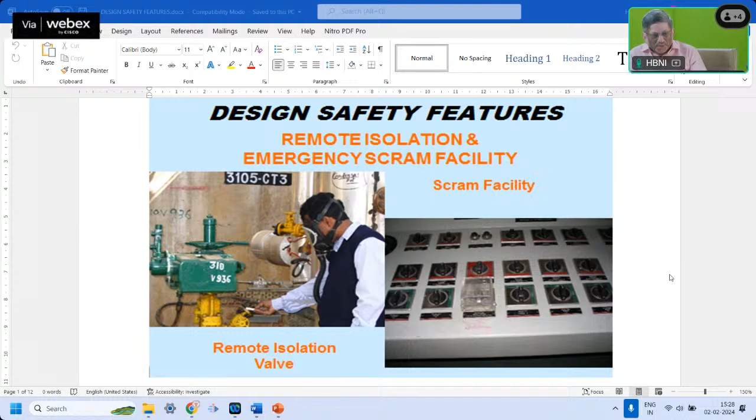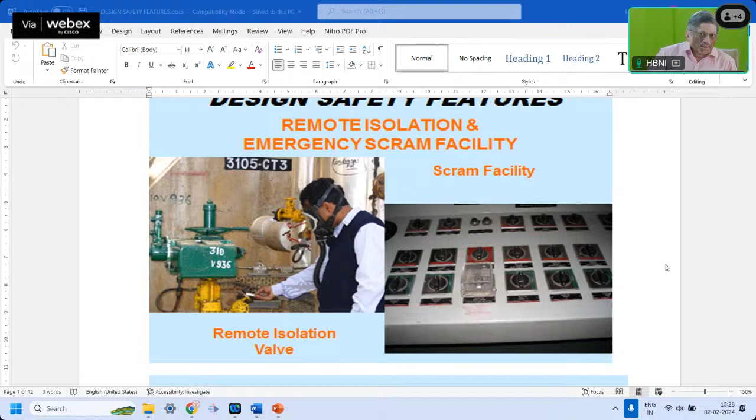So friends, I will just share some design safety features with the photos. Yes, design safety features, the earlier one. Just an introduction: these plants are outdoor installations. They are remotely operated, away from populated areas, and the plant has remote isolation, meaning any part of the plant equipment which is leaking or to be maintained, we can isolate immediately. If it is an emergency, we can isolate immediately. There are remote operated valves, air motor operated valves, which I have shown in the picture.

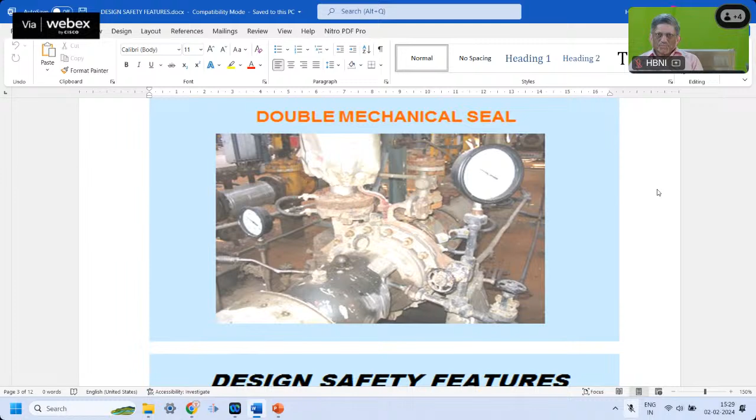Seal oil system. See, in our plant, for circulation of H2S gas, there are big centrifugal machines. For the shaft sealing, the compressed gas should not come out. So there is a seal and seal oil is injected in the seal. Therefore, H2S will not come out.

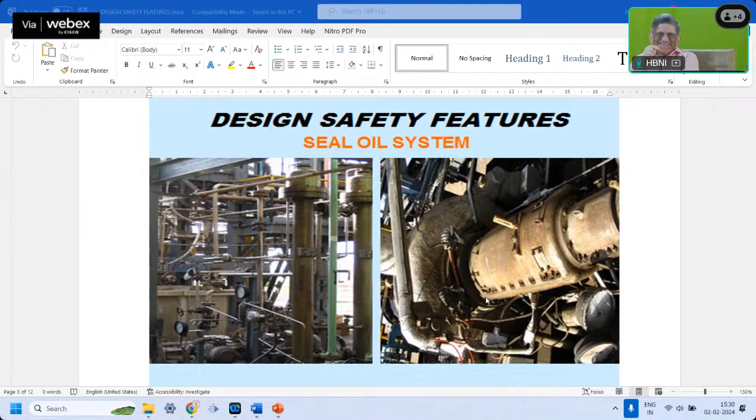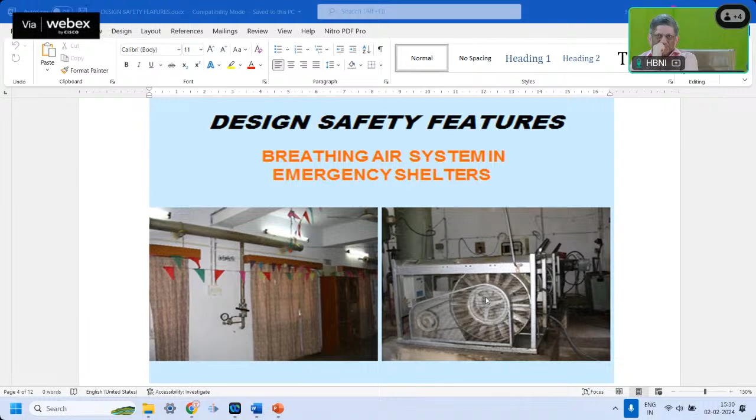Next, there is a breathing air system. Number one, in the control room, breathing air supply is there. It is leak-tight, so that if H2S is released, it should not come inside the control room. Similarly, there are emergency shelters. If there is a release of H2S gas, people are supposed to assemble in the shelters where breathing air is provided. These are the shelters with breathing air stored in the cylinders.

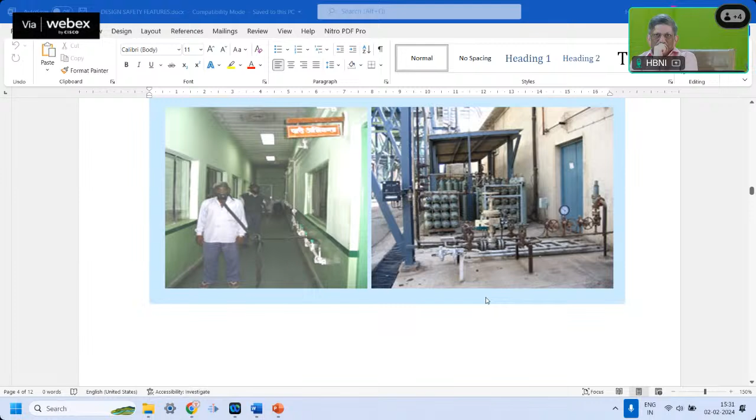Emergency power supply. If the normal power supply fails, then there is a backup of class 3 supply, that is a DG set supply. Also, there is a battery backup supply; there are class 1, class 2 supplies for emergency operations of the instruments and indications. Next.

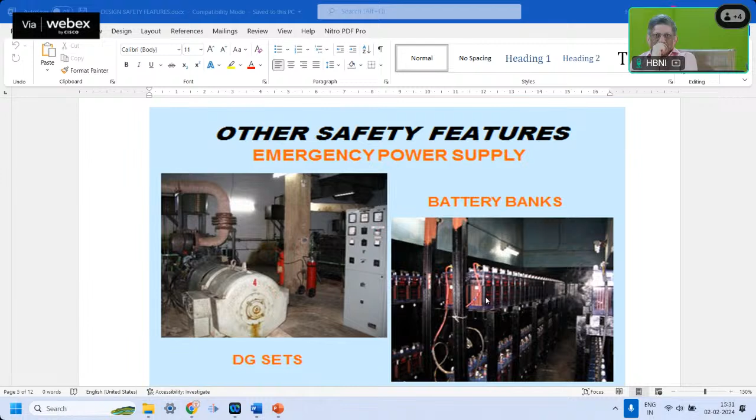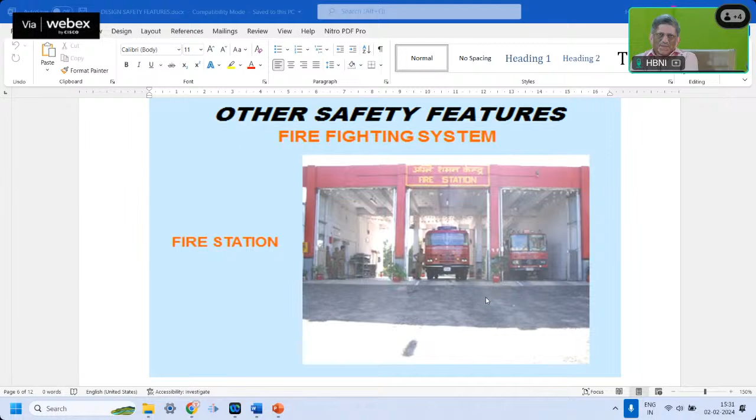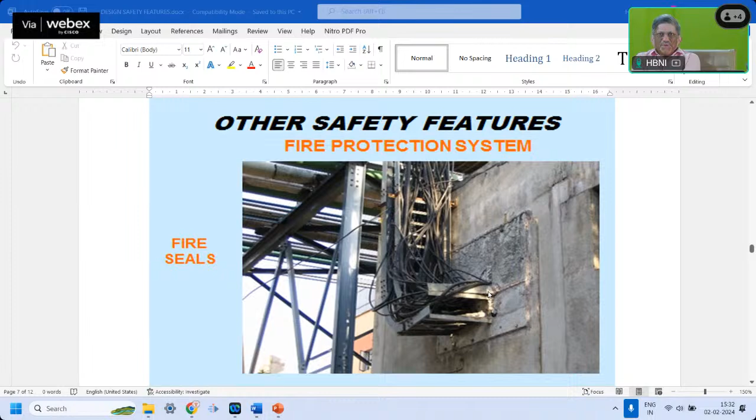Next. Fire protection system: there are H2S storage tanks. This H2S is soluble in water, so there is a fire water spray system that is called deluge system. In case of leakage, the fire water is sprayed to minimize the release of H2S gas from the leaking tanks. Not only that, the content of the tank can be transferred by gravity to the other tank, because it is stored in liquid form.

That is one feature. Secondly, the gas from the tank can be burned through the 120-meter tall stack and released. If there is a leakage from any tower, this tower can be emptied out and the gas can be safely burned at 120-meter height, and it will be released safely. Next.

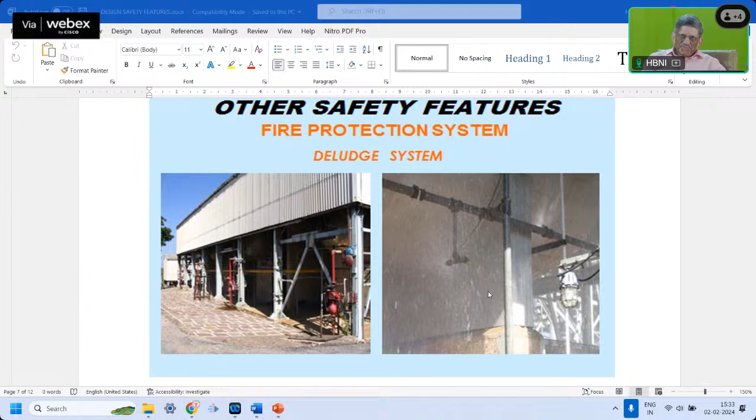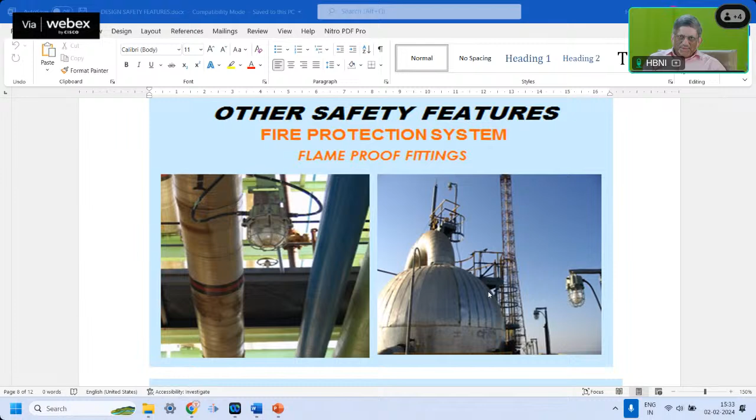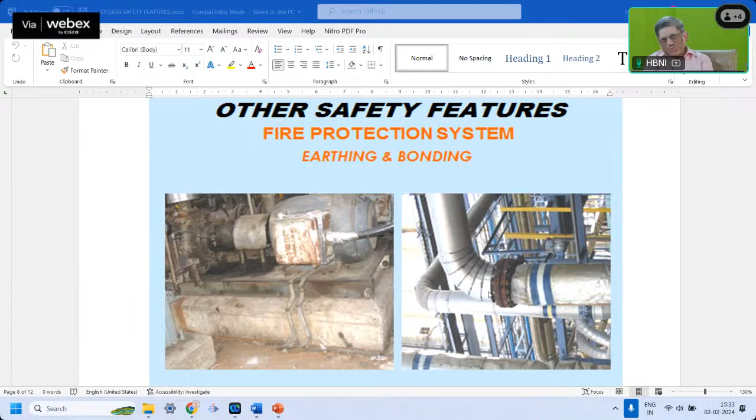There are flame-proof fittings, etc., so there is no spark in the flammable area. Next. Fire protection system: earthing and bonding is provided where there is a chance of a source of ignition, and also to take care of static electricity. Next. Fire alarm system. Next.

And as I told, there is a flare system, which is very important. If there is any leakage from any pressure vessel or tower, the tower containing about 50 tons of gas can be released through the stack within half an hour. It can be burned. Next.

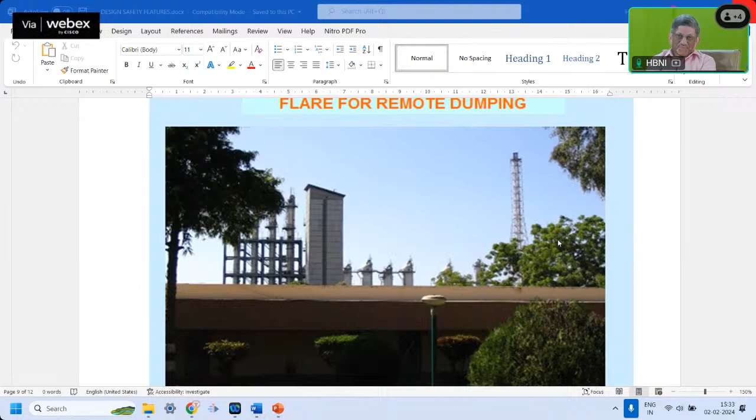So the design safety features are the backbone for safe operation of a chemical plant, and these design safety features should be monitored and kept in healthy condition. If you see Bhopal, design safety features were provided, but they were not in line. Now, to ensure that we have operational safety features, one is the technical specifications of the plant. The technical specification prescribes the monitoring and what is to be done if there is a failure or non-availability of the safety system. So that is a very important system in our plants.

Then training of the operational staff is very important. The requirement of the job and the capability of the operator should match, so we retrain the staff regularly. Authorization of the operational staff is another operational safety feature. Every 3 years, we check the manpower, whether they are upgraded. At that time, we check their capability with respect to attitude, skill, and knowledge.

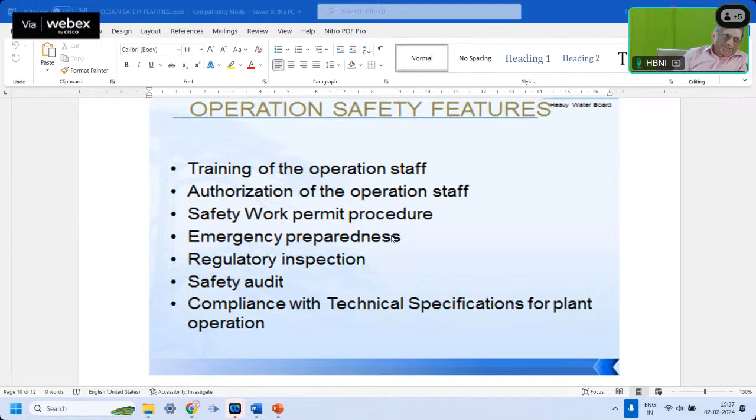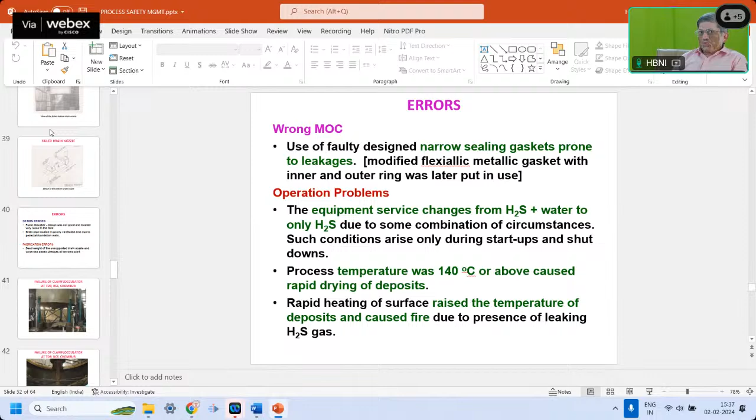So, because of these safety features and maintaining healthiness of the safety systems, there are no major accidents. However, I will discuss with you a few case studies. Friends, the accidents were mainly workplace type, mostly fall from height, then non-use of PPE, some flashovers, and these are the main ones. There were a few fatalities because of inhalation of H2S gas, but those were mainly due to non-use of PPE. So let me share with you some case studies.

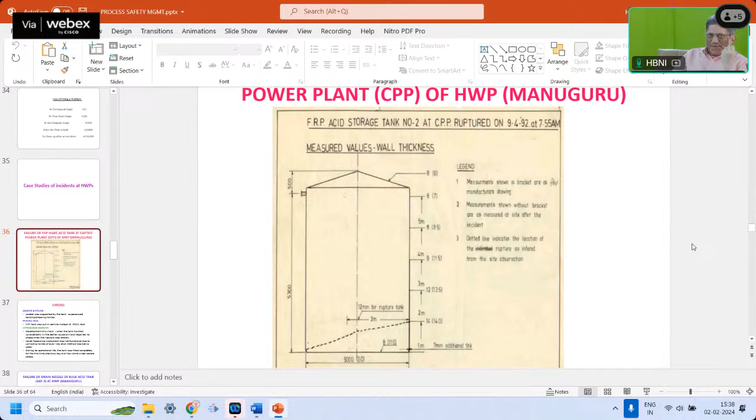So see, the design process, their ladder was supported by the tank, experienced bending breaking forces. FRP tank was put in service instead of MSRL tank. So the material of construction was not appropriate, and there were operational errors, development of cracks when the tank buckled during operation.

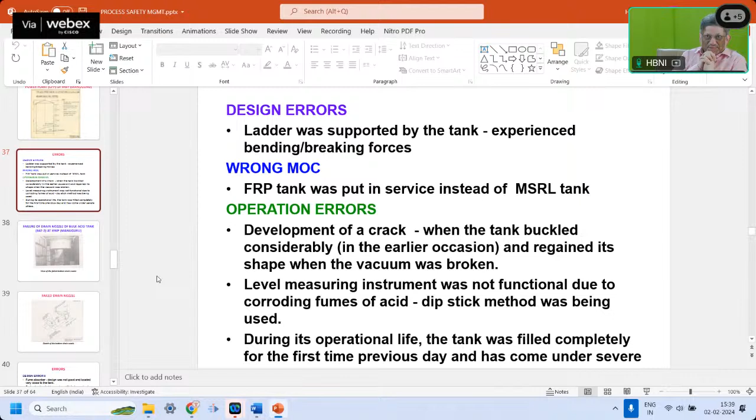See, in these storage tanks, if you drain the tank without opening the vent, then vacuum is generated, and the tank buckles and develops that defect. Level measuring instrument was not functional, so there were other errors. During the operational life, the tank was filled completely for the first time the previous day and came under severe stress.

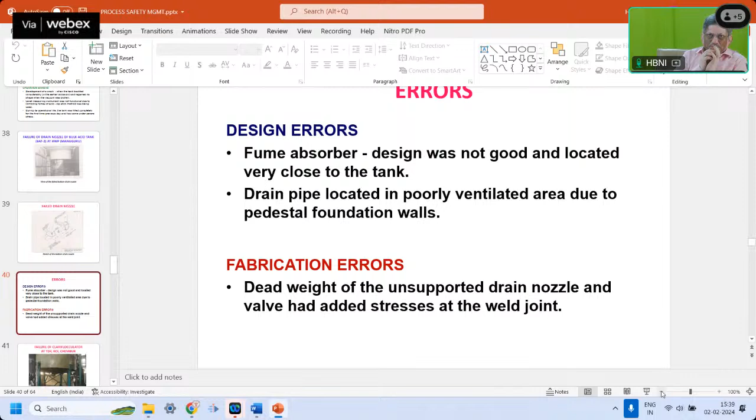This is another acid tank failure. You can show this photo, the upper photo. Okay, next. See, this is a bulk acid storage tank where the fume absorber is there because the acid releases fumes.

That fume absorber was located very close to the tank and it was not working. So it corroded the drain point and the drain pipeline itself collapsed, and all the acid in the tank, about 200 metric tons, got released, and it could be collected in a neutralization pit. The picture of the drain nozzle is shown here.

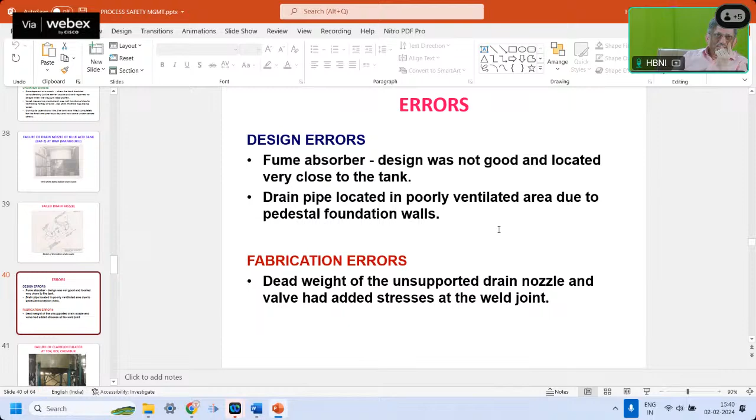So now we have made acid tanks as smaller tanks. They are rubber lined inside, outside is a bulk tank.

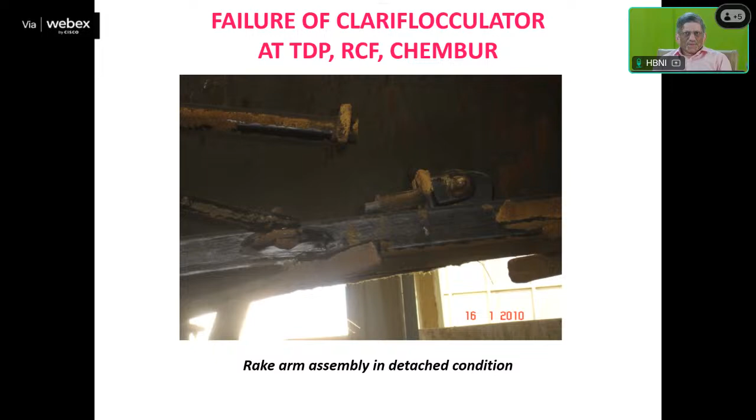So I will cover again - there was some acid tank failure because of the wrong material of construction.

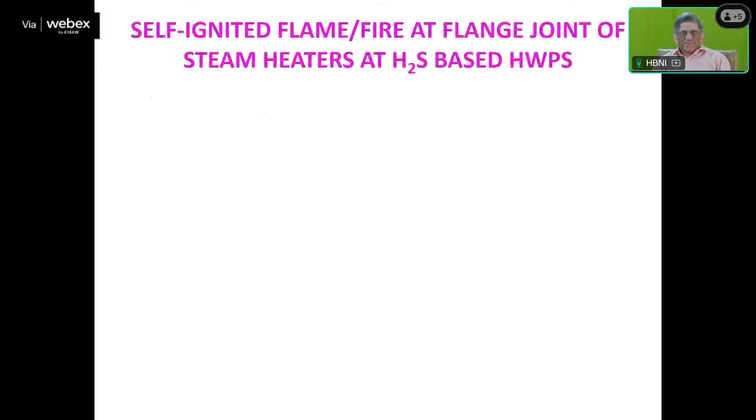There was a fire of H2S gas. The reason was defective gasket, improper flange joint, and hydrogen sulfide forms iron sulfide, and at high temperature the gas leaked and it got ignited.

Now, one lesson we learn is how to fight gas fire. Number one, we must stop the source of the gas, isolate the supply. If it is not possible to close the isolation valve, inject an inert material like water or nitrogen. So this is the lesson we learn on how to fight the H2S gas fire.

We cannot extinguish the jet fire because the gas is coming with pressure. If you put water, maybe the gas flame will be extinguished, but it can get reignited, or unburned gases will get released into the atmosphere and they explode and cause more harm.

So it is not possible to extinguish the gas fire. The solution is: stop the supply, inject some water, and cool the nearby pressure components. If the flame is touching a pressure component carrying hazardous, toxic or flammable material, then that will melt and the fire will increase again. So cool the nearby structure till we isolate it. This is a very important thing we must know while fighting gas fire.

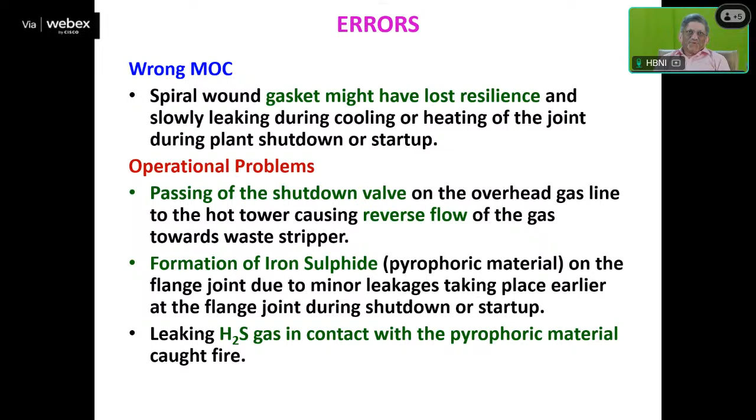Another thing, electrical fires.

Electrical fires are caused mainly by temporary connections - that's number one - and then maintenance. If the maintenance of the breakers is not done, then it causes fire. Also entry of lizards, etc., inside the breakers. The lesson we learn is: proper maintenance of electrical appliances, and no temporary connections.

Secondly, while fighting electrical fire, the basic rule is isolate the supply. That is important. In one incident, our people did not isolate the power supply because the plant could stop, plant could shut down. But that is not important - fighting fire is important. So irrespective of whether the plant gets shut down, we must isolate the supply of power. Power should be stopped so that the electrical fire will not increase.

And then comes extinguishing the fire with CO2. We cannot use water - water is ultimately to be used only when the power is shut down, de-energized. So for electrical fire, the message is very clear: isolation is a must, and then fight the fire.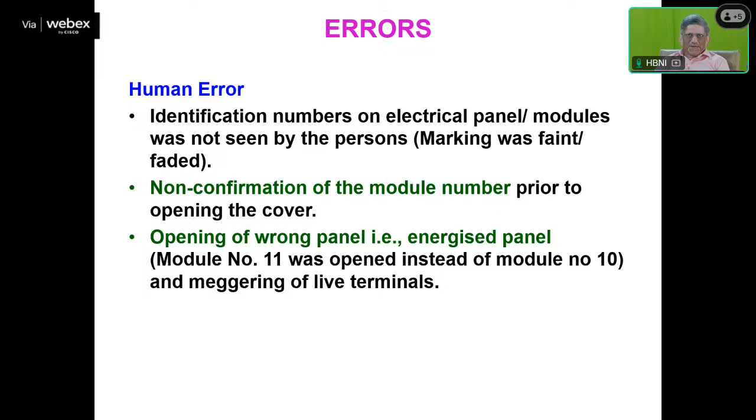So there are certain human errors due to shortage of time. See, there are two types of accidents: workplace injuries and release of toxic gases. This is the most dangerous thing - if there is a release of toxic gas or fire and explosion, fatalities are more. So we have implemented process safety management in the plant, and that helps a lot to prevent accidents.

So friends, the take-home message I want to give within one minute is: safety is a good business. Whatever factors affect production and quality, the same factors affect safety. If one takes care of safety, production and quality will be taken care of automatically. Safety culture is the backbone, and we must inculcate safety culture in the organization.

Safety culture development means change of mindset, and people should always be trained. They should be told the consequences of their actions. Prevention is better than cure - if you correct at the early design stage, the cost of correction decreases drastically. So prevention is better than cure.

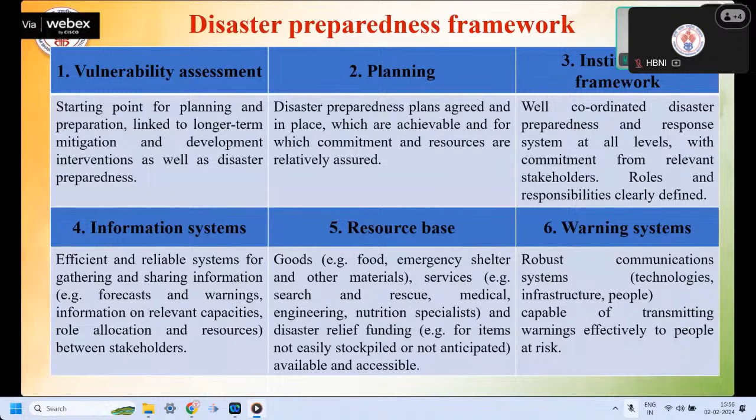Then response mechanism established and familiar to disaster response agencies. Education and training is very, very important, followed by mock exercises, rehearsals, or let us say, tabletop exercises. Some of you have already worked in these areas. So these are the 9 areas: vulnerability assessment, planning, institutional framework, information system, resource base, warning system - warning system involves early warning system - then response mechanisms, education and training, and rehearsals.

Disaster risk in India is compounded by increasing vulnerabilities. How? These include the ever-growing population, the vast disparities in income. We have some very rich people, some middle income people, and we also have a large population of economically deprived or poor people who survive or manage based on a lot of support they receive continuously from government systems. Then urbanization, industrialization, and

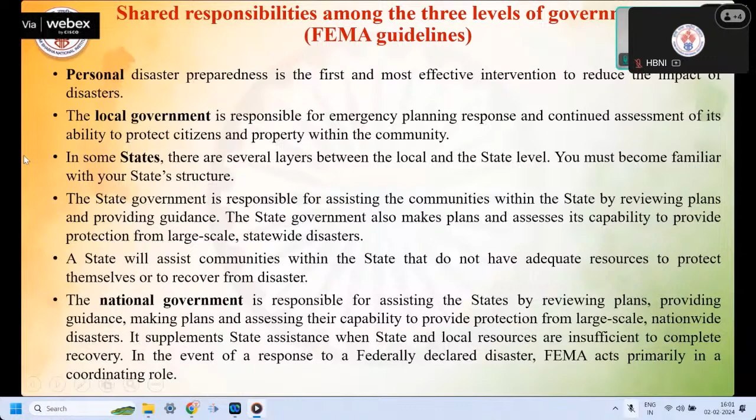This is just an example of how the American system works, because all the countries who are part of the UN system share each other's experience and pick up the points which are relevant for them.

Disaster management coordination includes the strategies and actions to plan, prepare, mitigate, manage, and recover from major emergencies. These two words, emergencies and disasters, are interrelated, or let us say interchangeable in this presentation. Emergencies include any man-made or malicious act, or natural disasters that threaten or cause a loss of life, injury, and harm to a person's life.

Responding to emergencies requires collaboration with a wide range of partners, including emergency centers, emergency managers, and all stakeholders. Planning for disaster emergencies means all these stakeholders, or partners, work together to plan. That means any plan made to counter an emergency for a particular area or population has to be planned together. Everybody has to be involved.

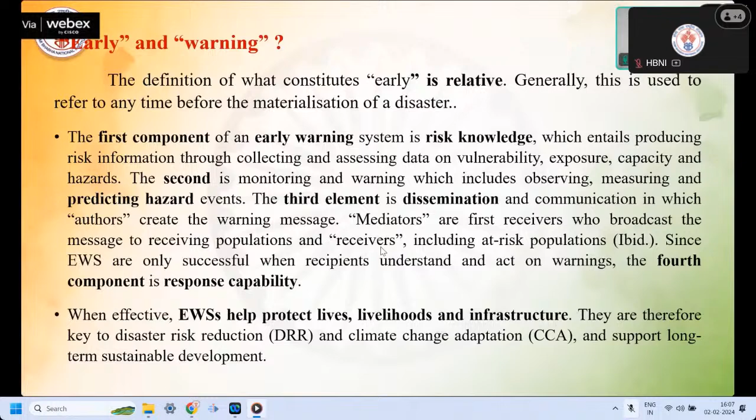This early warning system can also be integrated with the community. The community can also have a warning system called community early warning system, or CEWS. When national early warning systems disseminate warnings, they triangulate data with the monitoring of their own indicators and deploy early action where needed.

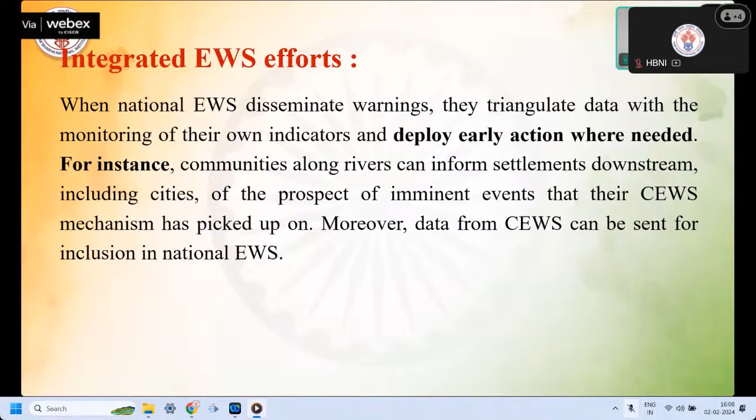For instance, communities along rivers—let's say there is a flood situation—those who are upstream can inform the people downstream that the flood is inevitable, and those areas will get flooded. It's a matter of time, so they can be alerted and accordingly take safety related actions.

Now we move further, that the risk assessment, the vulnerability, these are very important components of disaster management preparations. And the word risk reduction is used loosely. That means it can have many vague meanings and be used inconsistently. Disaster preparedness is one.

Basically, it has three main elements. That means many standard risk reduction terms are used loosely and inconsistently. Forecasting events and issuing warnings. These are the major elements of risk reduction terms: forecasting, then precautionary measures, and improving response by organizing and strengthening capacity to deliver timely and effective rescue, relief and assistance.

That means for risk reduction, for disaster preparedness, these are the three areas. That means forecasting, event forecasting or disaster early warning, precautionary measures. Now these are all important parts of the preparedness, and improving response. Okay. Now these same things have been explained earlier, but now these are all being discussed in

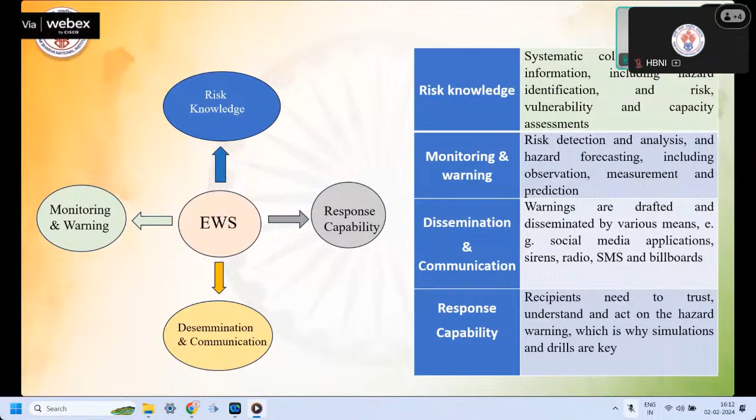Now, disseminate, and then the response capability. Response capability always plays a role, because whatever early warning communication is given, if the response mechanism is helpless or not properly equipped, then it may not be of great use.

And the common alerting protocol, this portion has been discussed in stage one of our lecture also. The common alerting protocol is a standard format for warnings and emergency alerts. When alerting the public, the information must reach vast numbers of people, the maximum number of people in that location, which is why it also requires multiple dissemination methodologies. That is because some people are connected to some methods, some to other methods.

So this common alerting protocol tries to pass on the early warning messages to as many systems as possible. So some people may get the message two, three, four times. But the idea is everybody gets it at least once. However, it is key that all recipients access the same key warning facts.

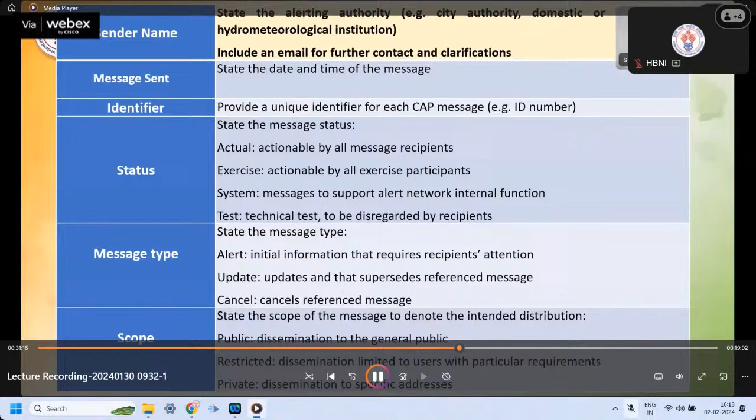Now, this is the common alerting protocol message, one typical draft. It should have the sender's name, the message sent date and time, an identifier to provide a unique identification of each common alerting protocol message, and status. Status means what is the status of the emergency. Then type of message: alert, update, cancel.

I have myself seen in so many places that the alert is given and after some time the message is cancelled. That is because the weather condition sometimes changes its course. So it should be clear whether it is an alert message or an update, or at the end whether the risk or danger is over. It happens more with cyclone or flood type situations.

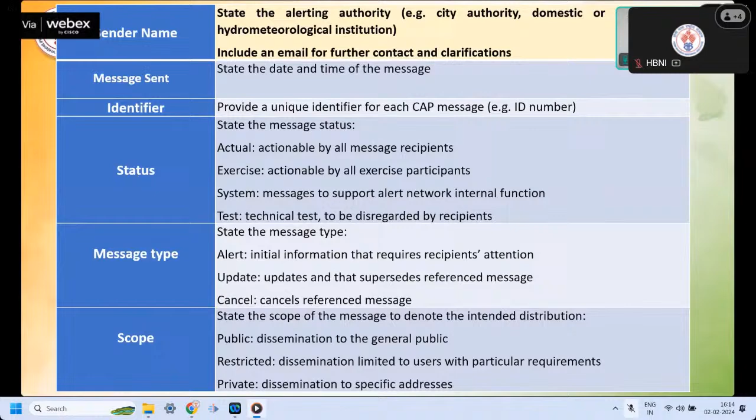Then the category: various categories like safety, security, rescue, fire, health, infrastructure, geological. Here itself the CBRN category will come. Then the message template: provide a headline, give a description of the risk information. The basic idea is to give the public risk information which they can understand. Then the priority, how serious and how significant the case is.

All right. Now hazards overview. Hazard in any disaster management is hazard, location, vulnerability. These are very, very important. The location-based recovery plan strategy. In order to properly plan for recovery from a disaster event, if there is a disaster already, let us say envisaged, or let us say in the thinking, there is a postulation.

The types of event that could occur in the location must be identified and defined. Identifying the hazards that occur along with the frequency and magnitude allows the recovery planning process to clearly understand the needs of the city, needs of the location of the city. In addition, a vulnerability assessment is used to quantify exposure and the potential loss estimates for each hazard. We move on to the next paragraph.

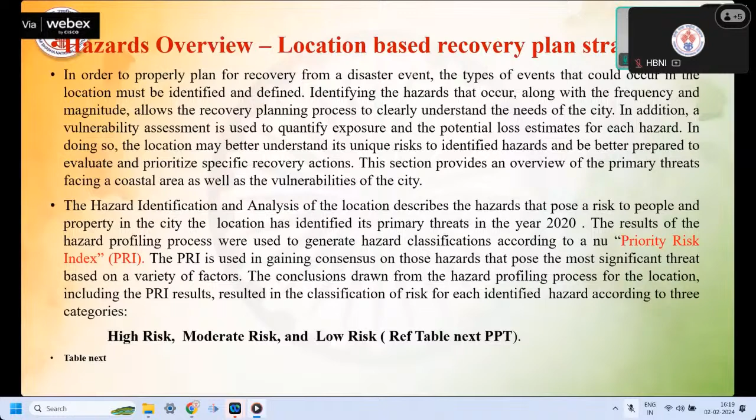That means that area is our candidate area. We have tried to classify the risk of the hazards, vulnerability in that area, and it has been categorized into three categories: high risk, moderate risk, and low risk. Okay, we'll see it in the next table. So that area, I have told you it is a coastal area near the sea coast, has the following risk: flood, tropical storm, hurricane, storm surge, extreme heat, public health emergency, wildfire, hailstorm, lightning, erosion, terror.

Then tornado, civil disturbance, drought. Then nor'easter, that is a type of storm. This is normally the word used in North America, I think on the eastern coast. And then sea level rise, then even a plane crash, earthquake and tidal. These depend upon the past data, wherever it is available and how much it is available. So this data has to be understood very well. It has to be given due weightage for its accuracy, for its seriousness.

So as per that exercise which was conducted, the high risk items have been listed like flood, thunderstorm, wind, tropical storm, hurricane, etc. That means basically the area is more into flood related or thunderstorm related emergency or disaster. However, these 10 emergencies or types of disasters have been brought into the moderate category. But that area does not have a big history, as per the data, of earthquake. So earthquake has been brought under low risk. An aircraft crash is brought under the moderate category. A commercial airplane crash has been brought under the low risk category.

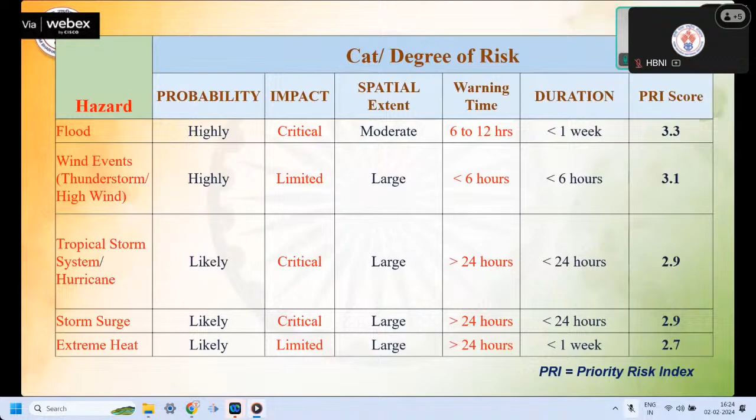Now, how this PRI is going to be useful in disaster management: this is how you give the priority and make a response mechanism according to that. And indirectly, it will also relate to how much fund can be given. So exposure to hazards can be an indicator of vulnerability. Economic exposure can be identified through locally assessed values for improvement. The top important thing in disaster management is life, and the second thing is property. This is quite related to economic criteria.

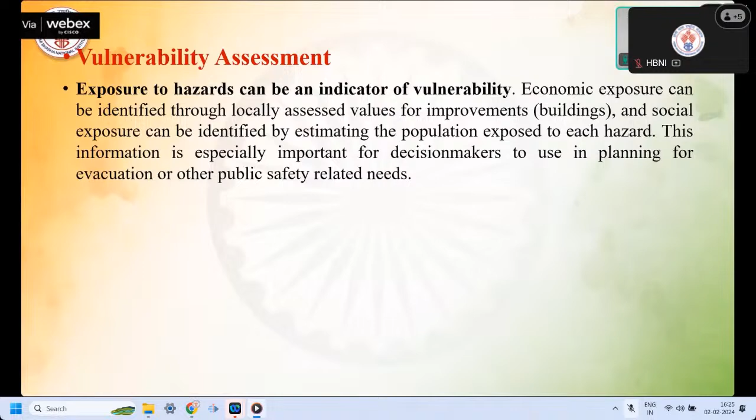All right, so now we move on to disaster management plan. This is a rather discrete topic we will discuss in maybe 2-3 PPTs. Disaster management plan has the following characteristics: the objective should be clear, it should be realistic. Where there are weaknesses, strengthen existing structures. DMP should cover it. That means hazards, vulnerabilities, and PRI, the priority risk index. The roles and responsibilities of all the stakeholders. The plan must be well informed. All relevant aspects like hazards, risk, vulnerabilities, and capacity should be included. It must prepare for extreme events and chaotic situations.

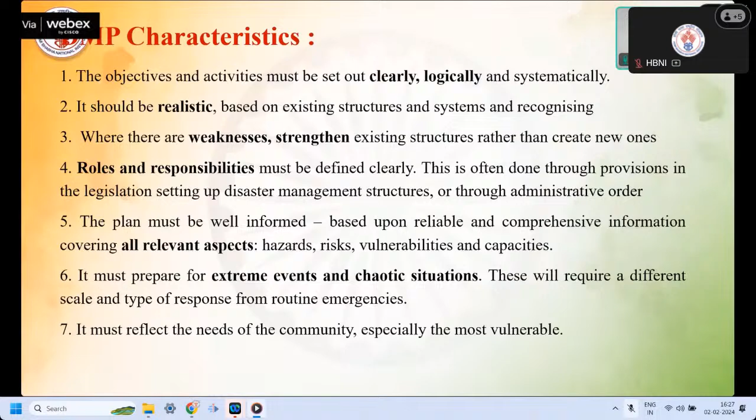This is very relevant in our country, India, because the situation in many places becomes very chaotic, and in a populous country like ours, a simple emergency can get converted into a very serious situation just because of chaos. Let us say where there is a crowd, if some situation, maybe even a hoax, develops, that can lead to a stampede. So that has to be properly addressed in the plan. Then the aim should be to provide effective and timely response.

In a disaster or big emergency, governments usually take the lead in disaster preparedness planning. But as in other aspects of risk reduction, the plan should integrate the skills and capacities of a wide variety of agencies. Sometimes the agencies may come faster, or do a good job even before the government mechanism comes into the picture. It should also encourage good coordination. There will have to be some center to coordinate emergency operations, but disasters cannot always be controlled in a top-down manner from a single point. Like COVID, that started with a top-down approach, but slowly it came to every level.

It should be owned by all the parties, meaning all the stakeholders. For the plan to work, people must believe in it and be committed to it. Regular review and updating is a very essential part of any disaster management plan. So here we close session 1, and I'm going to take some other related topics in session 2.